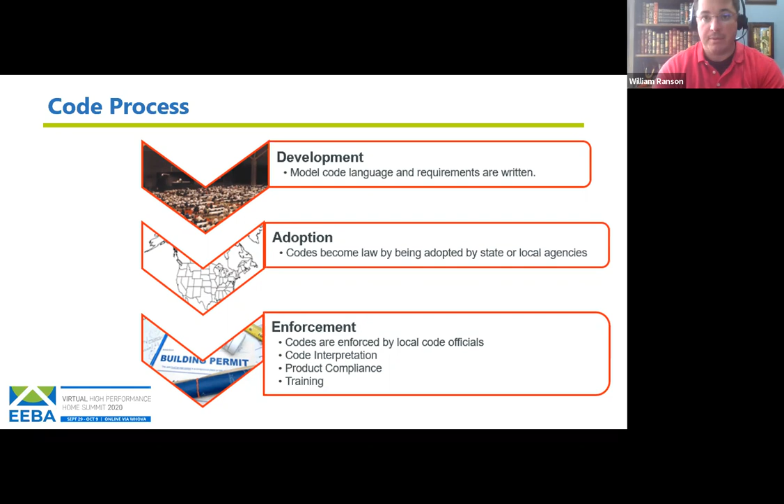And just a quick reminder about helping to understand which codes apply to which types of buildings. But again, here at EEBA, we're primarily focused on single family or townhouse type, 3-story and less. We're going to be talking about the International Residential Code and the IECC residential section of the code, but reminding you there are other code bodies that apply for other larger type buildings as well.

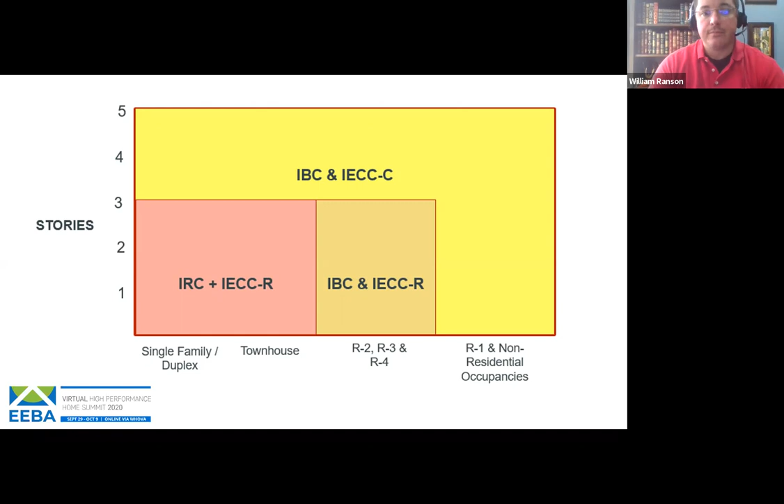One thing that's interesting to point out here, this is 800 plus data points of the most common energy code violations. You see we've highlighted here number 1 and number 4, but almost half of them deal specifically with issues around your building envelope and the R value of the wall itself. So either having improperly sealed penetrations, meaning you haven't put it together correctly, and then HVAC or somebody else came in and put some nice holes in your wonderful air water thermal barrier, or just not having the right R value that's required by the code.

And so this is one we're going to be talking about, some of what the code requires, and then Tom's really going to be addressing multiple ways we've worked to make sure that these are installed correctly as well.

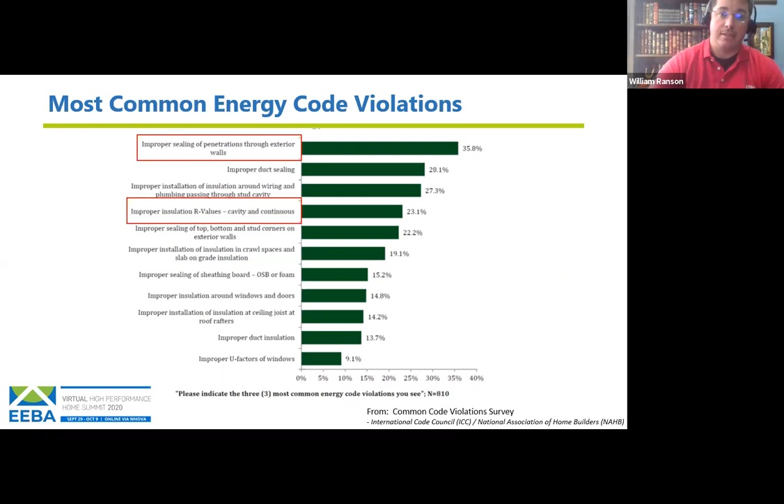One of the positive things about advancing of the IECC is how much energy efficiency we are getting into our base homes now, which also can translate into HERS scores, hopefully everyone's familiar with that. But if you start with the baseline of the 2006 code, there was a goal overall you see for each of the years of a certain percent improvement of energy efficiency over the base code.

And for the 2015 one, you saw they had a goal of 50% improvement, which is pretty incredible. Unfortunately, they only got 34%, but on the flip side, fortunately, they had 34% improvement, which translates into a 34 point reduction in a HERS score of a home built to that 2015 IECC code versus a home built to the 2006 IECC code.

There are lots of things that have been put into the codes that help drive these energy efficiencies. But one of the largest ones, and what we'll be focusing on today, is specifically around exterior continuous insulation.

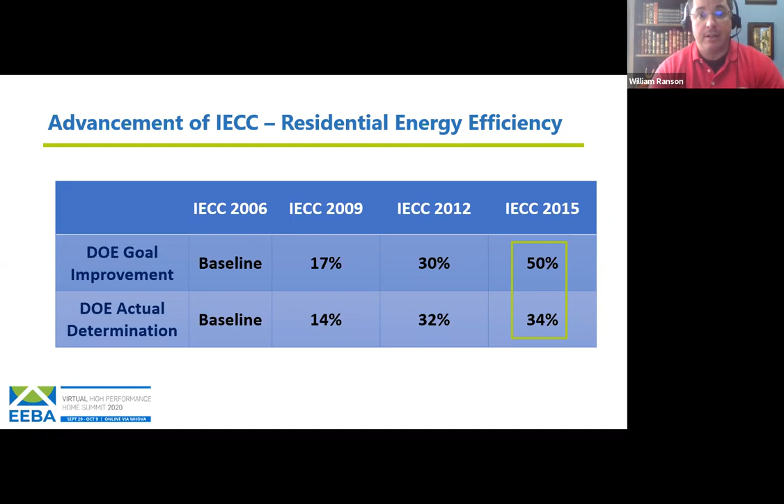You can see here the United States divided up into all its climate zones. Outside of climate zones 1 and 2, there are options in the 2012, 2015, and 2018 IECC for exterior continuous insulation. So what this chart is showing, for example in climate zone 5, starting with the 2009 code, but especially with the 15 and 18 codes being adopted by most states now. For climate zone 5, you would either need an R value of R20 cavity insulation, or R13 cavity insulation with a +5 exterior continuous insulation as well. My understanding of the 2021 updates we're working on is to further simplify this language around what the +5 means, so people don't confuse it with 13 and put another 5 somewhere else.

William, I know states are adopting these codes, but can you give a quick overview for people on the call of where states are at as far as adopting the 2012, 2015, and 2018 IECC or IRC? It's pretty wide variation, all the way down to some places like Arizona that don't have statewide code adoptions.

But in general, and Tom, you can help me with this one too, we've seen that between 2012 and 2015, most every state has adopted up to that point. And then there are a few states leading the way on adopting the 2018 codes. Great, thank you.

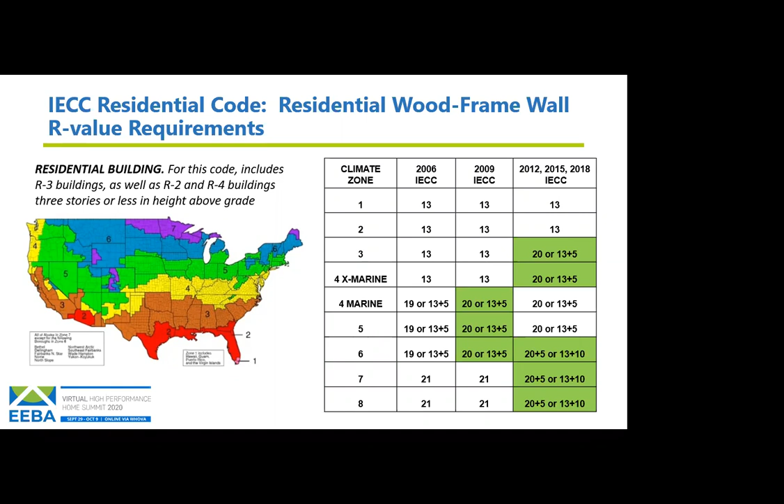Okay, so this is the code we're talking about, but clearly as we move along with codes, it's continuing to recognize the importance in all climate zones of the benefits of continuous exterior insulation.

So why are they putting this into the codes? Why is this such a big deal? Really, the benefit of continuous exterior insulation is reducing the effects of thermal bridging by framing. On our wood frame building, up to 25% of the perimeter of the house is losing heat through conduction through the studs. It's equivalent to having one of your four walls not there in terms of heat flow through the building.

The picture we show here is just an example of, in the wintertime, on the left you'd see the conduction through the studs, the heat loss through the studs, versus putting continuous insulation to reduce that heat loss as well. Clearly that's a generated image, but we have some real life scenarios coming up in the next couple slides of infrared images that show in more detail what we're talking about.

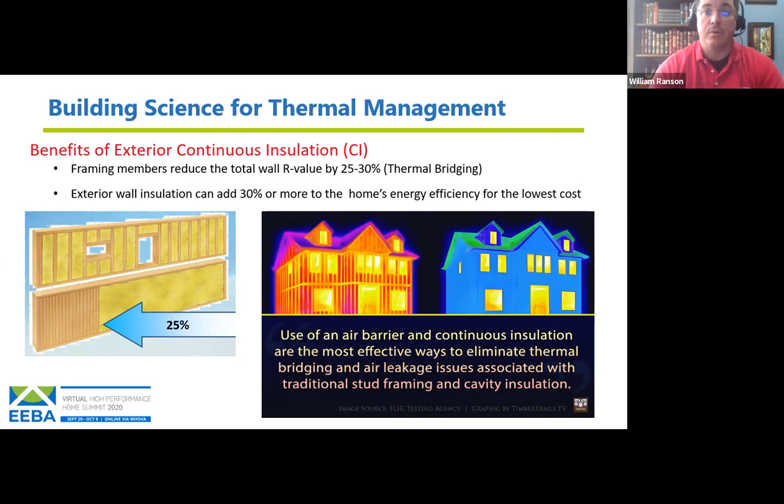Here is one real life example. If you see the picture on the left, what you're looking at is early morning after a cold evening, such that on the outside of the house there's been condensation occurring. However, because of the thermal bridging, because heat from the house is coming through at all the stud lines, it's warmed up the wall where all the framing members are, to the point that there is not condensation there. Granted, this is stucco siding, and there's other issues going on there too.

But what you're seeing here is, because you can clearly see the outline of all the stud lines, that's all the heat loss coming out of the building on that wall. Versus what's shown here, if that same house had continuous exterior insulation, it would not have anywhere near that heat loss or the moisture buildup that they're seeing on the stucco there.

So it gives you benefits both in terms of better energy efficiency for your home, but also better durability of your walls as well, not having potential for moisture accumulation, especially in the colder winter months.

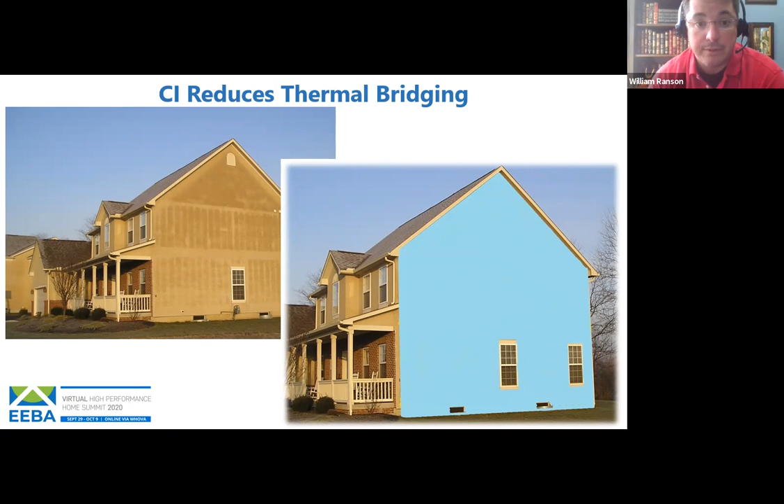Again, this is a similar concept to what I was talking about before. The benefit of exterior continuous insulation is simply that it keeps the wall warmer in the winter, so that condensation, which occurs purely from a temperature-driven phenomenon, is reduced. By having exterior insulation, the OSB or panel board or whatever your structural element is in your wall stays warmer, which lowers the risk of condensation on the first cold surface the warm air will reach - oftentimes the interior of the OSB - which is right where your batt insulation is, and a really bad place to have water accumulating in your wall.

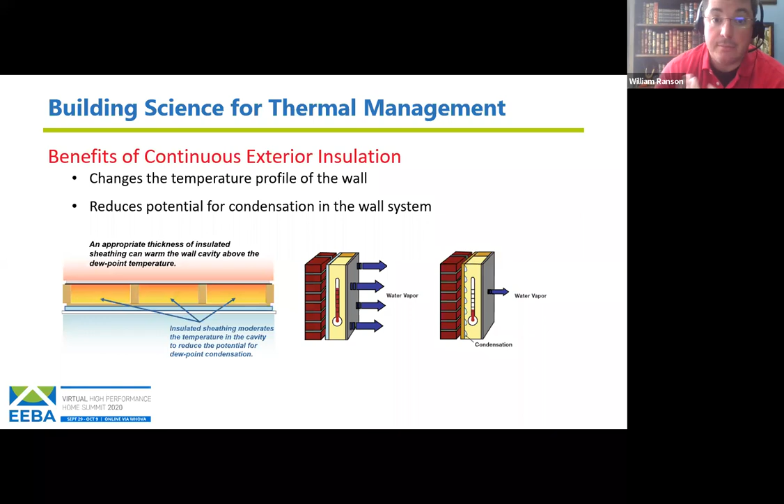And we know this happens because we've measured it. Here's a project where we intentionally had a series of homes all right next to each other in the same subdivision, all with the same general north-south facing elevations as well.

We had 5 homes built 2x6 OSB. If you remember back to the energy codes, it gave you options of either a thicker wall with more insulation in the cavity, or R13, a thinner wall with exterior continuous insulation. So we had 5 homes built with the thicker walls with all the insulation in the cavity, and 5 homes built with standard 2x4 walls with exterior continuous insulation. We put sensors on the inside of the OSB and measured the moisture content over a 3 year cycle.

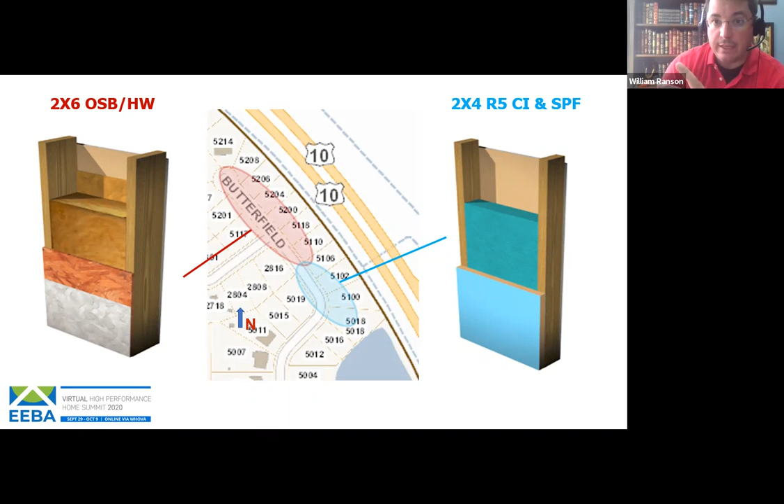All the homes were tested for blower door, all achieved relatively the same numbers, less than 3 air changes per hour at ACH 50, in the 2.8, 2.9 range, so all were pretty similar there. But as each of them were occupied by people, the actual use of the home was slightly different, and we'll talk a little bit about that as we go into the results.

So what this graph is showing here is over 3 winters, and the winters are the spikes where the graph bumps up. Over 3 winters, or 3 years of data, the y-axis is showing moisture content on the interior surface of the sheathing, and this is for all of the houses that were 2x6 with no continuous exterior insulation.

What they show is the bump up in moisture content is always occurring in the wintertime. When it's very cold outside, it's warmer inside, you're having that thermal gradient, and the cold OSB is causing condensation on the interior surface there. Now you do see that it dries out in all the summer times, but nonetheless you're getting above 20% moisture content for several of the winter months. Interesting that winter of 2014, if people remember, was one of those years when we had that polar vortex and it was really cold, hence the much higher moisture content levels you see there versus the other two.

And William, where is this, what zone is this in? What town is this development in? Tom, if I remember correctly, this was in climate zone 4. It was either 4 or 5. It was in the Michigan area. Yeah, okay, then it was 5. So I said then it was climate zone 5.

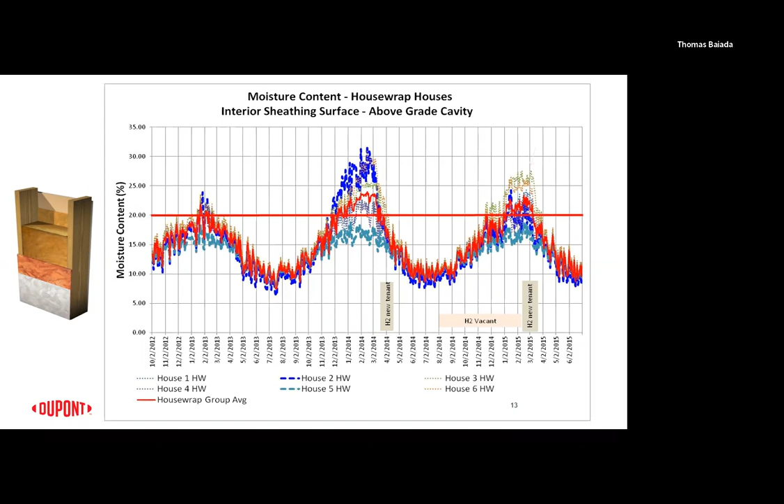But Tom, did you want to add anything on that? Yeah William, I definitely agree. I think that question really pertains to inward driven moisture, solar driven moisture, which, like William mentioned, is a benefit of that exterior insulation, to help block any of that inward drive. So you get that advantage there as well. The exterior insulation also serves as that secondary layer, or intervening layer, that we all know we need to have over our primary drainage layer. So there's some advantages there, like William mentioned.

So what we show here is this wall structure certainly does work, especially if you have an elderly woman who's hot all the time. But if we want to prevent our interior sheathing from ever getting anywhere near that moisture content, we move to 4 houses down in the same development.

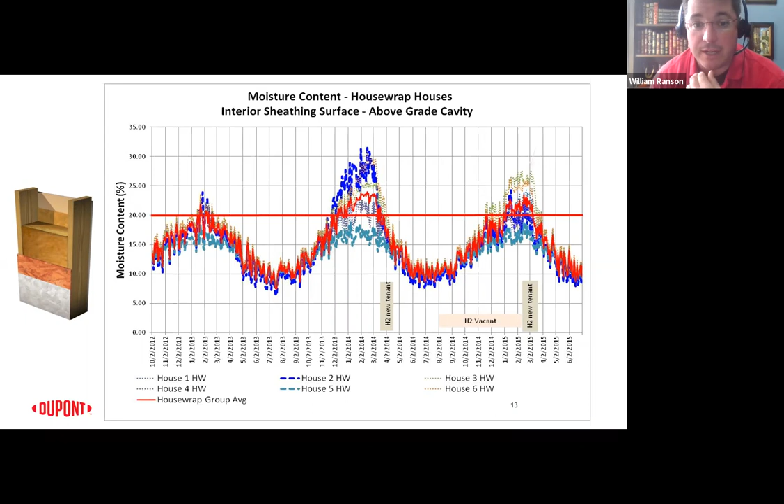You see again for all 5 homes, and the average line shown there as well. So exact same climate, exact same build, everything else the same, slightly different occupant use, but nonetheless a significantly different amount of moisture content in the wintertime on the interior.

We did not, because of such varying use of energy bills, were really able to do a direct apples to apples comparison, but I would surely imagine that these homes would have lower energy bills than if they were built as the homes on the previous slide, used the way they were. Especially the woman keeping her home at almost 80 degrees during the polar vortex. I bet she had some monstrous energy bills.

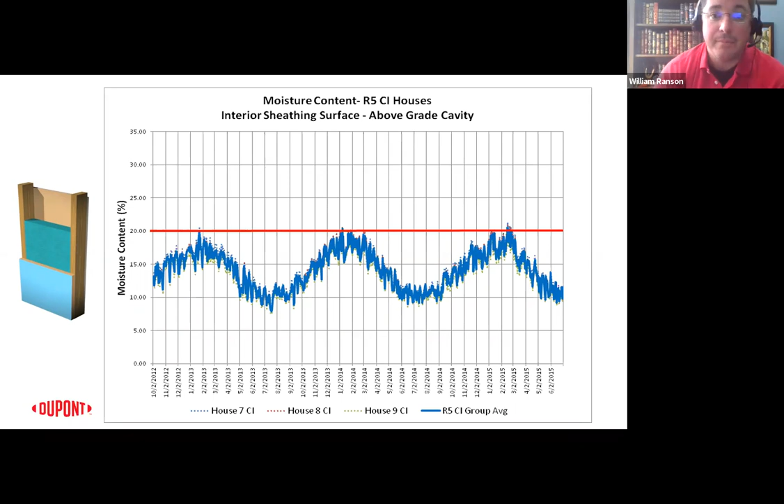But we use these to show the benefits of both the durability as well as energy efficiency. And some other things about continuous exterior insulation before I turn it over to Tom to tell you how to do this properly with an air and water barrier, is that oftentimes people forget that basements are terrible insulators.

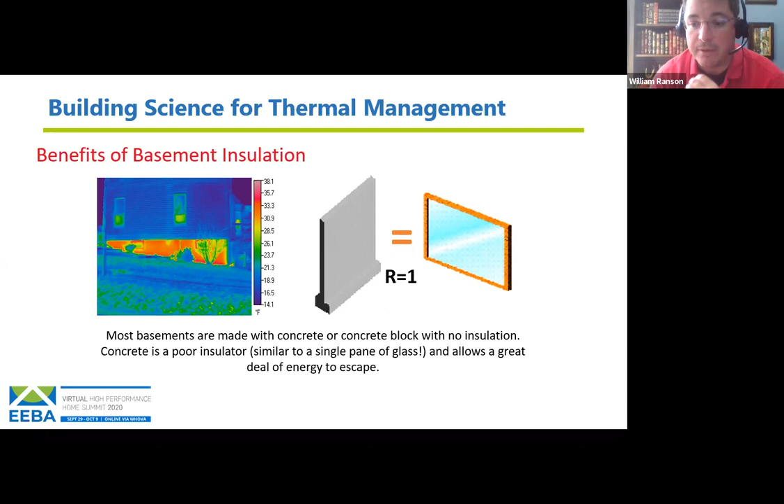In fact, a wall of concrete is equivalent to about an R1, the same as a window. So you can have a lot of energy loss through your house, even the relatively small space that's exposed above ground. And we know this because we've seen it. The next slide coming up has some infrared pictures that show this loss.

We've also modeled and proved with some test homes that simply adding R5, similar to what the codes allow as a +5 exterior option to meet energy code requirements, gives you about an 8-point benefit in a HERS score, simply by adding R5 insulation to the basement. This can be done when the house is being built, on the exterior, or added on after the fact as well.

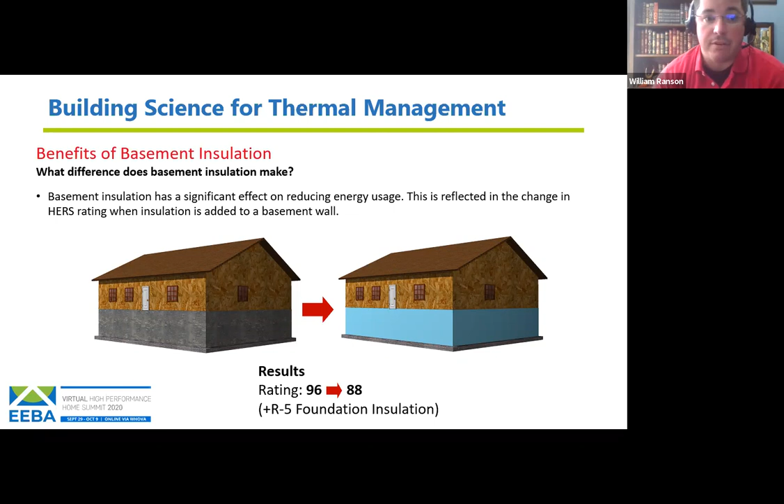So we certainly realize that not only for foundations, but for exterior walls, putting a portion of your insulation outside of your sheathing, having the +5, or in some of the colder climates the +10, helps prevent thermal bridging, helps keep the walls warm, helps prevent condensation that can occur in the wintertime, and makes a more comfortable house with better energy efficiency. Lots of benefits there.

But there are some tricks on how to do it properly. And I think before I turn it over to Tom, if there are any last questions, either on the code or the science behind it, I'll take some of those.

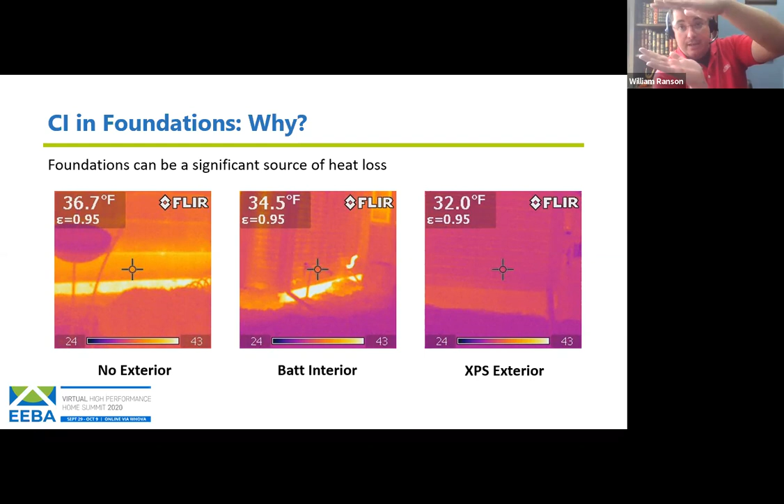The problem that a lot of people have when they have an interior vapor barrier and something like XPS on the outside, and they run into problems, they're actually running into problems with air leakage, because air leakage, especially from the inside, brings an incredible amount of moisture into that wall cavity as well.

We've seen that the critical point to getting this right is during construction, as they typically weatherize the exterior of the house first. If it had been raining while this was going on, they need to make sure to dry out the home to the inside before installing the interior air and vapor barrier as well. Then at that point, they have a very durable wall structure that our colleagues in Canada have been building for 30 plus years with no problems, again, when done correctly.

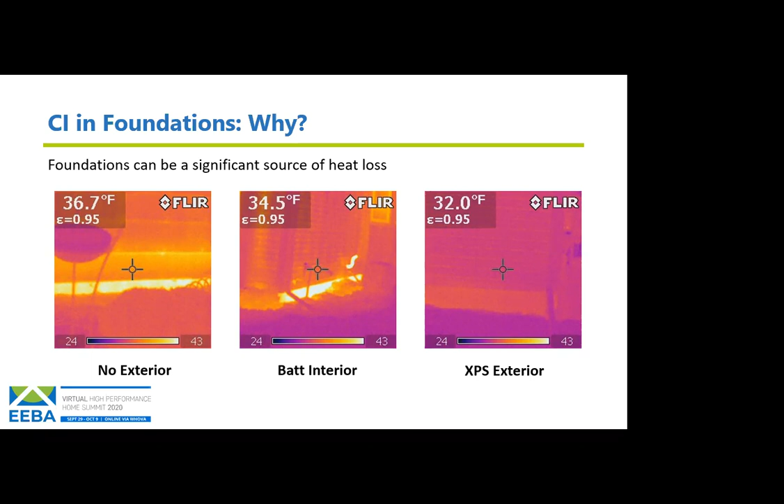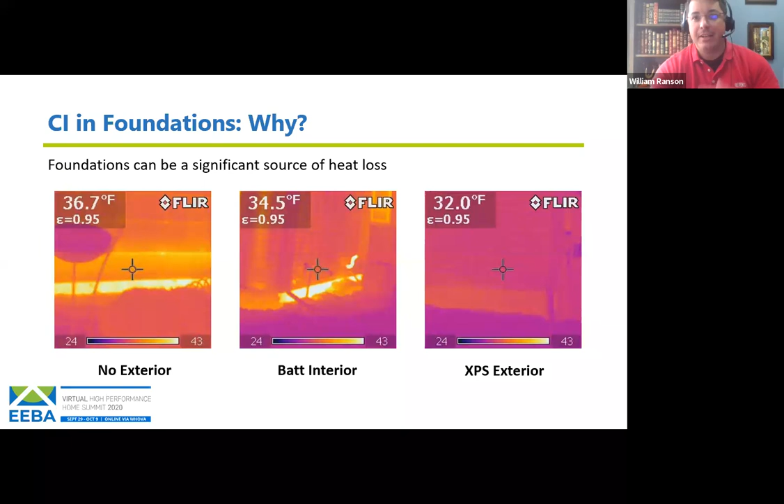So I think I addressed that. Tom, anything to add to that one? No, I don't. I think you nailed it. Okay, you can disagree with me, it's okay. Tom and I have worked together since he was in college and not long after I was in college. So I'll turn it over to you, Tom, to go through your part of how we make this happen.

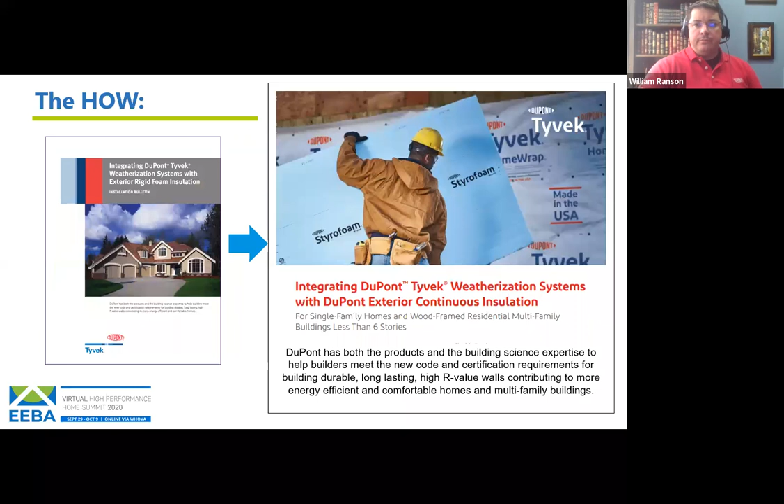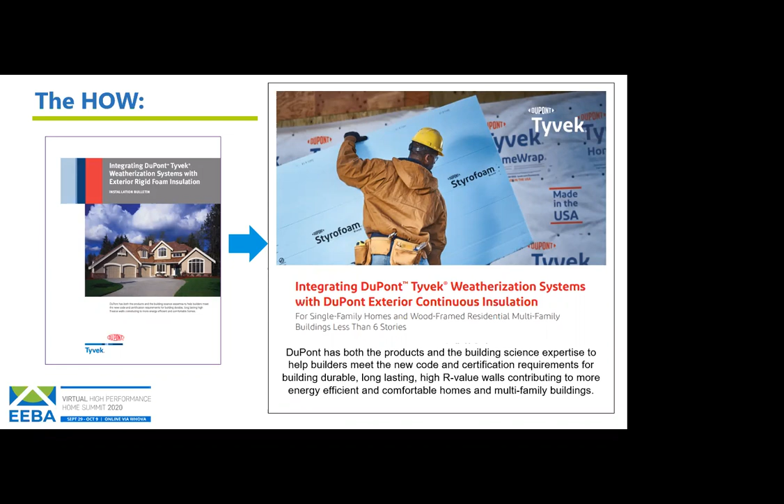Tom Baiada here, part of our technical support team, and I've actually worked in the development of some of the details of the how. Hopefully you understand some of the basics around why exterior insulation is a good idea, but then how do you go about implementing that and executing a good installation on your homes to make sure the details are carried out correctly, that you're air sealing, as William alluded to, and installing the products in the correct order. So you may be asking, what is that correct order? We want to go into that a little bit here.

I'll back up just a second - this is aimed primarily at single-family homes and lower-rise wood frame buildings, multifamily buildings that are essentially built like a big house, think garden-style type of building. So it certainly applies to townhomes as well. Next slide, William.

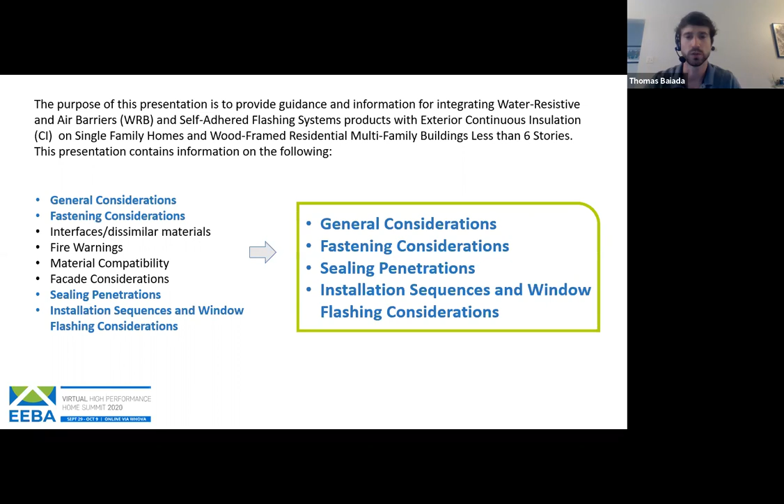So kind of as we get into those categories, right? Starting out with some of the general considerations, essentially what I have here on the left is the text from the document, but I want to highlight some of the key areas and considerations that you're thinking about.

We always talk about the WRB and where the flashing should be in relation to it. Of course, you want the flashing on the same plane as the WRB so that you create one continuous drainage plane down the wall path, so that any water that may get behind your cladding, whether it's vinyl siding, fiber cement siding, even brick or stucco, you have that continuous drainage plane that directs water out and away from the building.

So you want to carry that same principle here when you're installing exterior insulation. There's multiple ways to do it. You can see in the bottom right there, we're showing a simple view of exterior insulation either over the WRB on the left, or the WRB over the insulation on the right.

What we want to get into is that a wall is built as much more than just that opaque wall that you're seeing there. It has windows, it has dryer vents through it, pipes. So we want to make sure that we're considering all the different parts of a wall assembly so that it can be executed correctly and we don't have any issues.

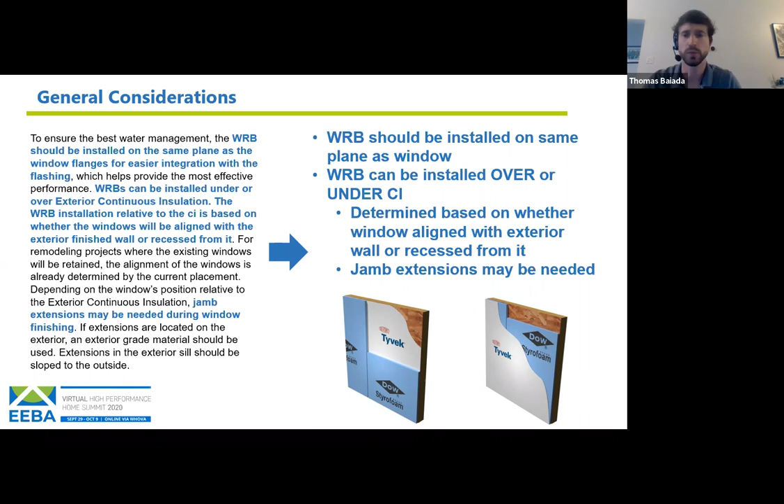As you get into what this really looks like, what I was talking about here is having the windows either aligned with the finished wall or recessed from it. And that's really within this document I mentioned, how we've split up the different applications. So when you look at how you get your windows planed back out to that exterior wall, again regardless of cladding, there's a few different ways to do it.

It can be either under or over the insulation, the CI, continuous insulation. In order to have the WRB under the insulation though, and align the windows with that wall, you're going to have to bump out that window. The window is going to have to be brought out the thickness of the insulation to plane it back out with the cladding layer.

The reverse of that, of course, is if you put your WRB over the insulation, like what is shown in the picture there, it simplifies some of those details. We'll get into that as well, but you can see that that detail looks pretty similar to your typical window installation method, with the exception of the bump out.

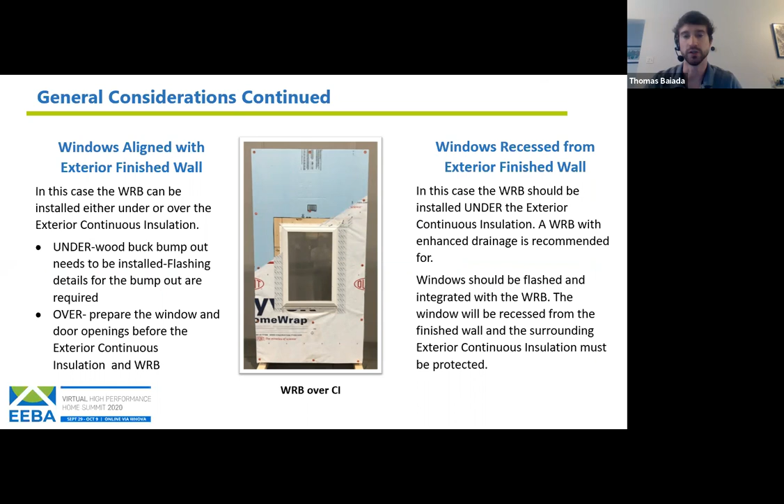And so there's a few considerations there, right? There's considerations around when these different materials are being installed. Of course, we always, as much as possible, try to promote minimizing the number of overall penetrations through your WRB layer. And so there's different methods for doing that.

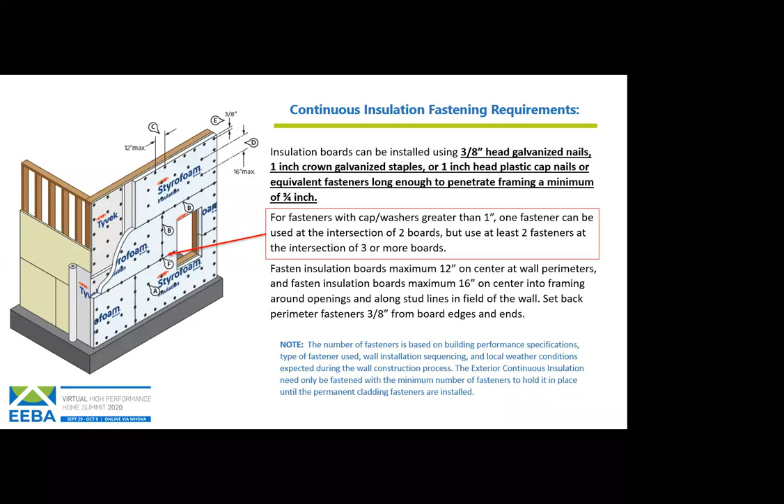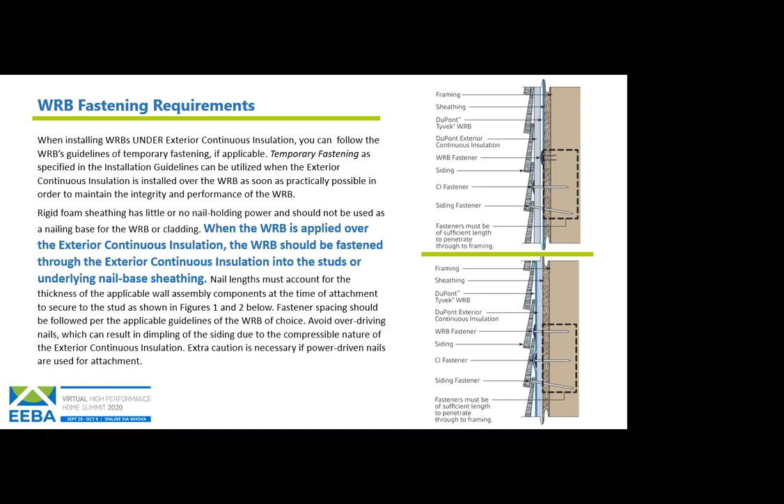Tom, yes, just a quick question from Jeffrey Luoma. He says he has compressed wood particle board underneath the siding. It doesn't hold a nail that well. Any experience with keeping this or changing it out? I believe your comment was you got to mark and hit your studs on that, but please answer that one. Yeah, that's a good question. You are going to have varying substrates depending on the time of construction of the building, whether it's a reside building or new construction. So certainly, yes, the recommendation in that case would be if you don't have a substrate which has the nail holding power that you would otherwise be looking for, like an OSB, you would absolutely need to make sure that you're hitting a stud to make sure that you have adequate holding power for either the WRB layer or the insulation layer.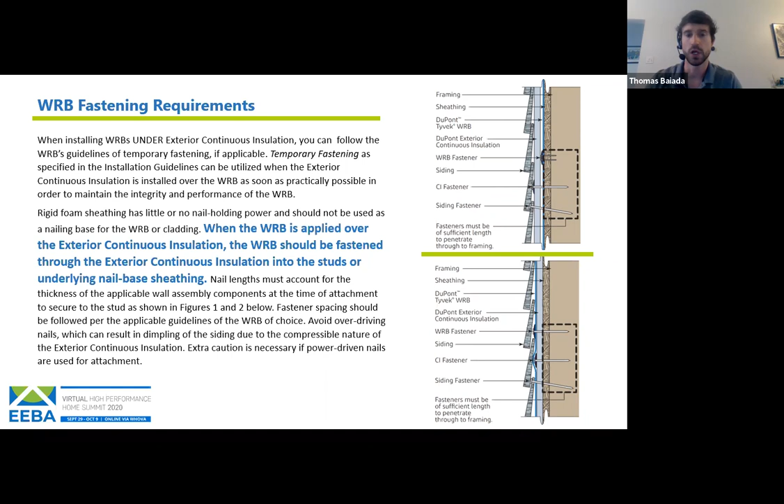So that's where, again, we're showing the penetration there into the stud. And then the next slide here actually talks about that penetration depth specifically.

For the insulation, we're showing the styrofoam, the XPS, extruded polystyrene insulation. So when you're thinking about the depth of that, we're talking about a penetration into the framing member of a minimum of 3/4 of an inch.

So if you have an inch of XPS insulation, equivalent to that R5 per the code requirement, at least in certain climate zones, you'd be looking at a 1.75 inch minimum.

And that doesn't even factor in the thickness of the sheathing, so it would actually probably be about a 1/2 inch thicker than that. So that's where you're factoring in the thickness of the insulation and increasing your fastener that much more to ensure you're getting adequate holding power.

And so the recommendation for the types of fasteners for insulation, there's different methods or fasteners that can be used, even down to a typical 3/8 inch head galvanized nail. The best recommendation would be a cap fastener.

Of course, you get much more holding power, as well as reduce the likelihood that fastener is going to penetrate further through the insulation than you want it to. You want it to sit flush with the insulation to help hold it in place.

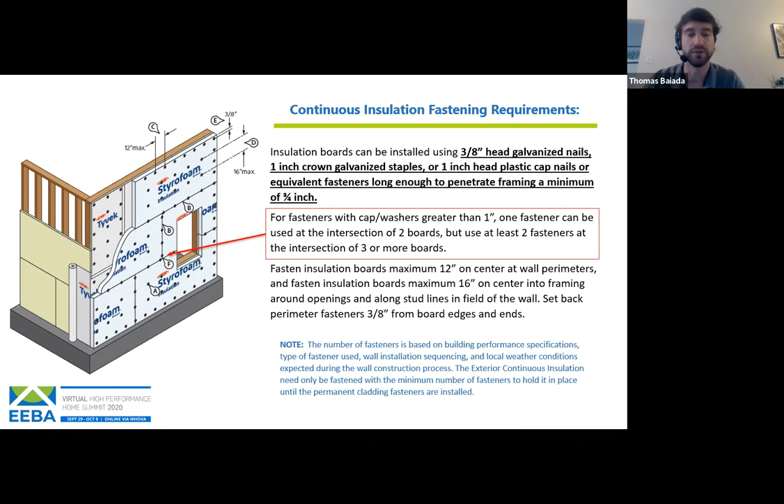Next slide, William. One interesting thing as we were developing these details, we realized we have flashing products to seal pipe penetrations and other details. So as we were thinking about some of these smaller penetrations that often can be made late in a construction process—if you have HVAC and you realize you haven't quite put a vent where you need it to.

Or a dryer vent where you need it to, it's easy enough to drill through the wall and put that penetration where it needs to go. But how then do you seal it? How do you make sure you have that same level of air and water holdout if you have the WRB now installed behind the insulation?

So that's what this depiction is showing here, is that if you have a penetration like a pipe penetration that's drilled through the wall late in the process, the reality of the practice then really to seal back to your drainage layer, which is the WRB, is removing the insulation around that area so that you can access the WRB to seal off to it around whatever that penetration may be.

So we'll talk a little bit more about some of the advantages and challenges of the different installation methods here. Clearly, this shows an advantage for installing the WRB over the insulation, because in that case, if that penetration through the wall is made late in the process, your WRB is already the outermost layer. So you would just be simply sealing to the WRB layer like you otherwise would in your typical construction practice.

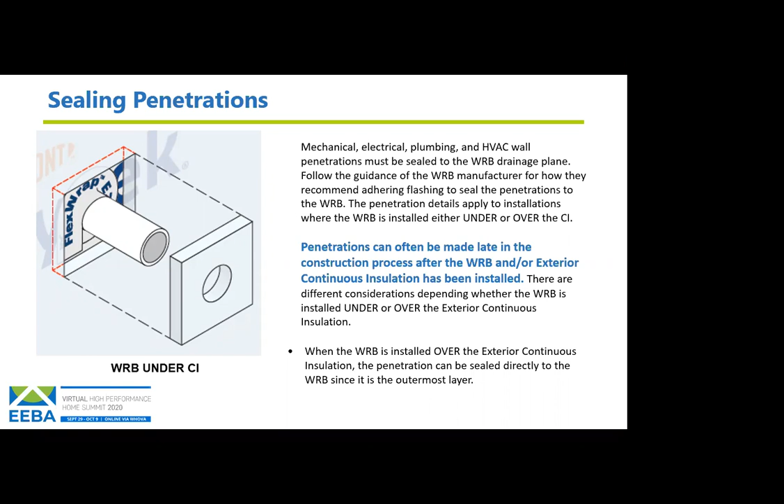Tom, is it best practice still—what we used to do when I built was all the penetrations had to be done before the weather resistant barrier went onto the house, so we didn't face that problem. Is that still the best practice you recommend? Yeah, that's absolutely the best practice, and that happens 100% of the time, right? No, it doesn't. The reality is some things change, right? You might...

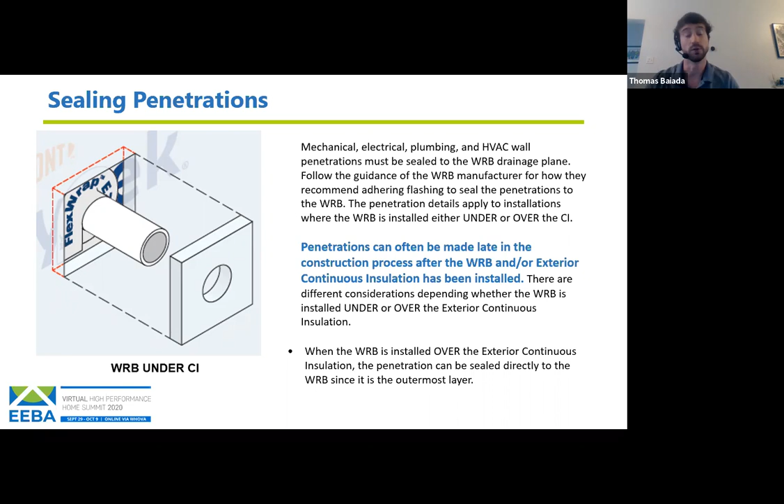You might get an RFI or something changes late in the process of construction, and that's just the reality of how construction goes sometimes, unfortunately. So these are things you think about, maybe call it forgiveness of the construction practices. How are you accounting for those things, and are you ensuring your trades will easily be able to seal to this, and what's the likelihood they'll take the time and effort to do so? These are some considerations you can think through in the overall design and sequencing of materials.

This is a little bit of a busy chart, but again I spoke to advantages and challenges. The columns here are WRB under CI, WRB over CI, and the advantages and challenges of each. I'll start with under CI and advantages. You're installing your WRB first, so it's going directly over, probably with OSB or plywood as your sheathing, so your fasteners follow a standard installation like they always have. So it's a bit of an advantage from that standpoint.

Your WRB layer can be installed with a temporary fastening method if the insulation layer is going to be installed soon thereafter. And of course, all WRBs are susceptible to UV light - it's just the nature of how polymers work, so we have to take that into account. The foam actually helps provide additional protection. So if your trade is installing the WRB as well as the foam, and you have a separate trade for your siding, depending on scheduling, that foam can help protect the WRB layer and ensure you're not going beyond the UV limits of whatever WRB you may be using.

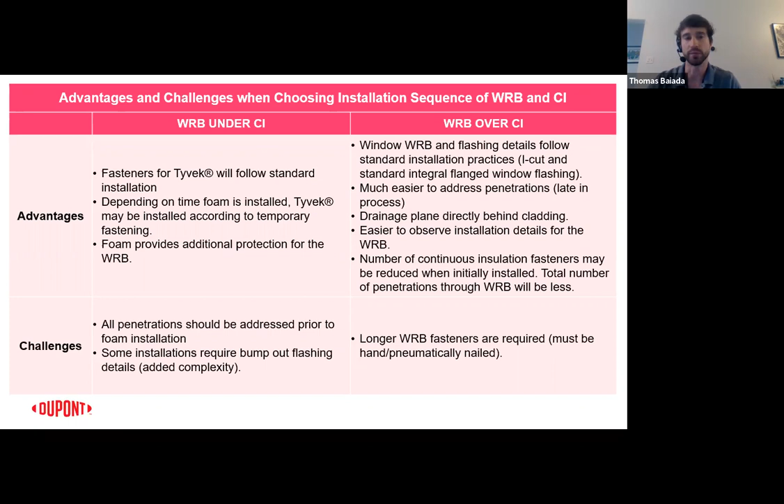From an inspection process, or if you have a third-party inspector verifying the details of your installation, it's going to be much easier to observe that installation if the WRB is over the CI. And going back to the number of fasteners, the continuous insulation fasteners can be reduced when initially installed. The main challenge there is making sure you have those longer fasteners for the WRB, because it's going over the CI, so you're accounting for the thickness of the insulation to get back to a solid nail base for holding the WRB into place.

Okay, so we talked about the different methods for installing the insulation, the WRB - is it under, is it over, and how does that affect the windows? This is really a key area. We broke that down into 5 sections. Certain areas of the country, the windows are installed before the primary WRB layer, versus after. That's the split on the right versus the left of these 2 tables. We accounted for that as well as the CI under and over, and we're going to break down each one of these sections here. I do have a note at the bottom - I mentioned this a little bit earlier.

In terms of installing a window over the insulation, do you need to bump it out? Do you need a wood buck there to directly nail the window into if it's an integral flange window? Ultimately that comes back to the window manufacturer. Based on our internal testing, as long as you've accounted for the thickness of the insulation and are getting adequate penetration back into the stud for structural support, we have testing showing that if the insulation thickness doesn't exceed 1.5 inches, that can be considered. But ultimately it depends on the window manufacturer and their recommendations for their particular product. So make sure if you're installing a window directly over the insulation that the manufacturer is okay with that as well.

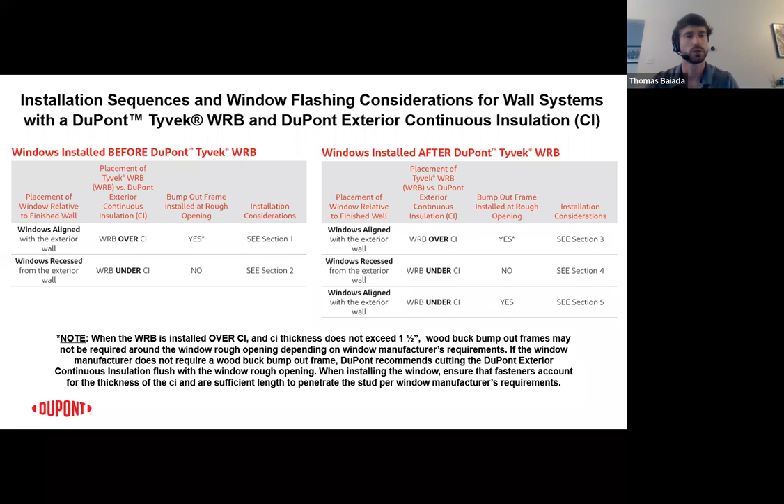Going into the methods of the different sections, there are 5 sections. Sections 1 and 2 show the methods when windows are installed before the primary WRB layer, so you're addressing and flashing windows before putting the rest of the WRB on the wall. This usually comes down to sequencing of trades. But if you're combining that now with the installation of insulation, how do you do that?

Looking at section 1 on the left, having the windows installed before, you want to align them with the exterior wall. The best way to do that is to have the insulation behind the WRB. So the basic breakdown of the layers is: adding that solid wood buck if needed, the insulation layer, protecting your window sill with a product like FlexWrap or some other sill protection method, installing and flashing the window, and finally installing the WRB and sealing it off to the flashing - that's the sequence of materials for that type of method.

If you look at section 2, where you're installing the insulation over the WRB and not bumping that out, you're going to have that situation where the window is potentially recessed from the exterior wall, and things like exterior jamb extensions may come into play. So back to a question earlier, we're showing the crinkled type of wrap there, the drainable wrap, to help promote drainage between the layers.

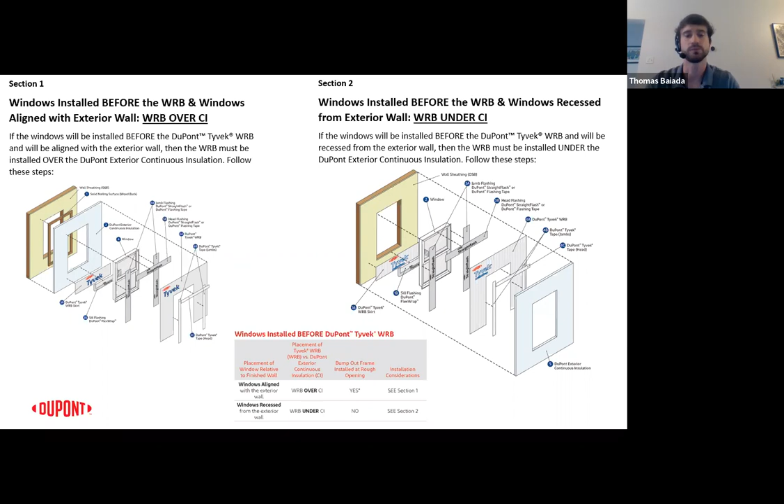I'm highlighting this particular slide as one of the methods that I think is going to be more common, and it also shows the installation of the WRB over the insulation, back to some of the advantages around that. If you look at the breakdown of the sequence of layers, it's another scenario where you consider whether or not a wood buck bump out would be required prior to the installation of your insulation.

Once you've installed the insulation, installed the WRB layer, then you install your window, again with sill flashing, then flashing of the jambs and head, and finally sealing off the head flap. This is a method that I'd say is more likely more common, depending on certain markets, geographic areas, climate zones. This is showing the windows installed after the WRB.

So sections 3 through 5 show the installations with the windows installed after the WRB. You don't have, if you noticed in the previous slide, there's a skirt method or an apron method that the sill flashing is integrated with in order to bring that out to the outside, and that doesn't come into play when you're installing the windows after the WRB.

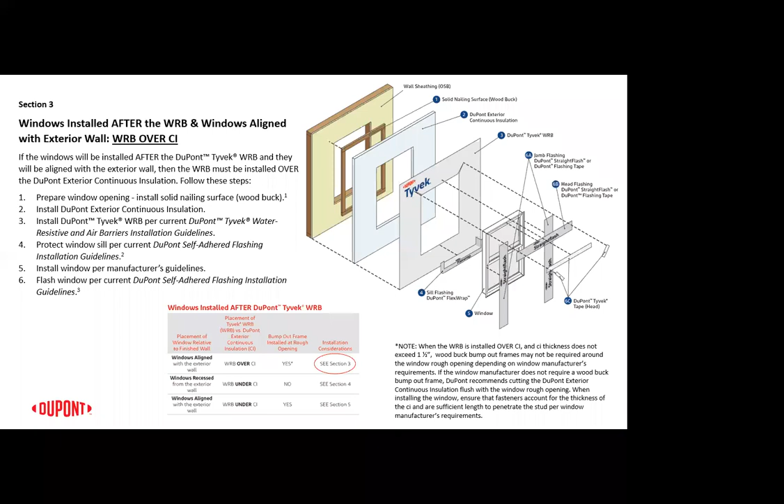Well, I think if you are interested, some of it goes back to your fastener recommendations, right? So if you're smart about your fasteners and fastening both at one time, that's going to save you on installation, right? Absolutely, that's a really good point. Great.

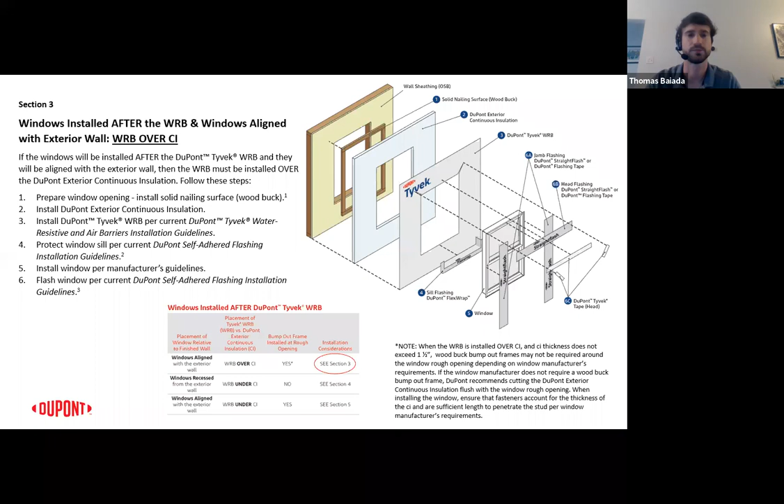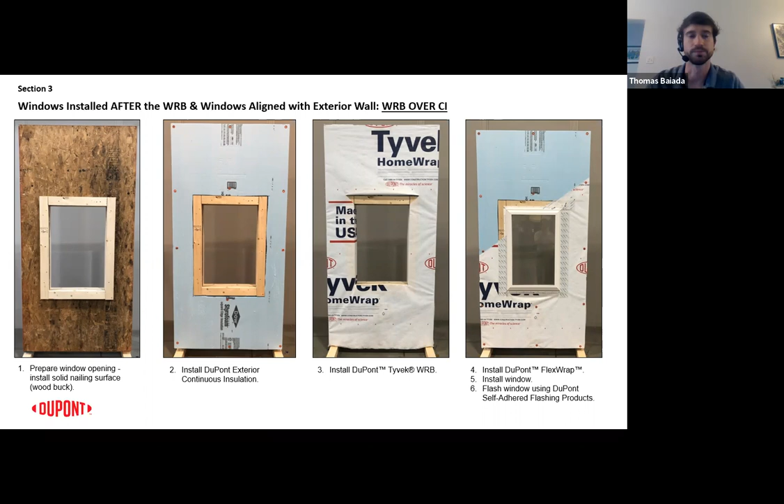So of course, this is the situation where you may need to consider jamb extensions from the exterior, depending on the recessed amount of that window.

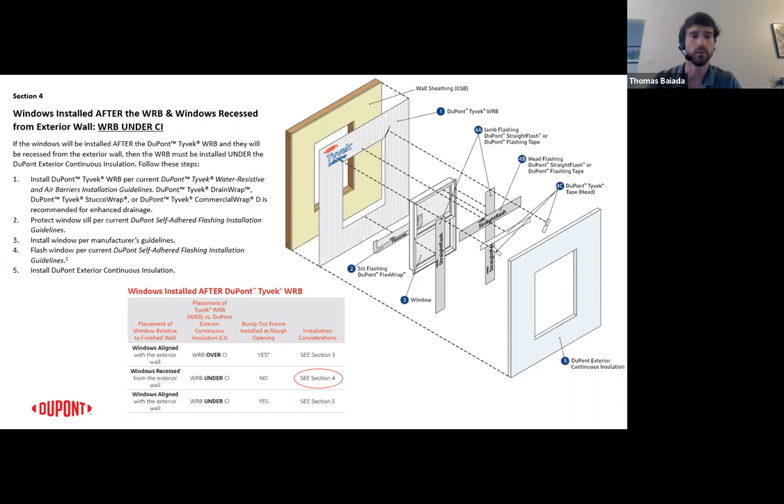And then finally, this is fairly common, at least in my experience supporting mostly multifamily construction. I've seen this detail used fairly commonly, where the WRB is installed over the sheathing, but they want to move the window to the plane of the cladding layer. So if you have the WRB on the sheathing, yet you want the window on the main layer, you still have to integrate your flashing back to the WRB.

So that's going to require you to bump out that window and then use a different detail to flash around that bump out in order to make it air and water tight.

And you're doing all of that prior to the insulation going on. So from a labor standpoint, you're doing most of the work for the layers there, especially around your flashing details, with your last step being the insulation, and then finally the cladding would be going on.

And so the slide after this, I have a breakdown of what that process looks like.

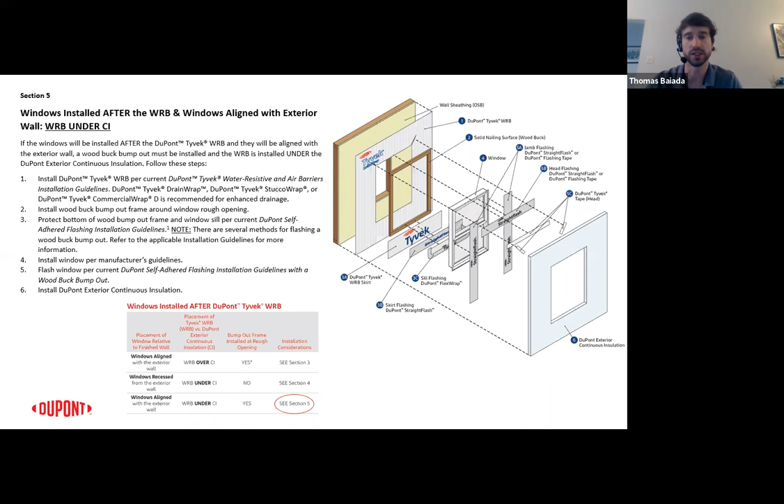So if you look at installing your WRB first, there are different methods for treating a bump out. DuPont has several methods for doing so. Again, this is a method where, if you look closely, you can see that the Tyvek is wrapped into the opening before the bump out goes on.

But in some cases, you may have those bump outs on the wall before the WRB is installed, so there are different methods for accounting for those types of details as well. But nevertheless, you have the WRB layer installed, you have a bump out, and then you begin to flash the opening.

Of course, you need to protect the sill before the window goes in. So you can see right away that you're doing some more complex flashing details to build out from the main plane of the wall to that sill, which is now on a different plane, making sure that that is all sealed up correctly.

So there's different methods. We're using a piece of the WRB, an apron, versus the image to the right, which shows flashing there if you look closely. So there's different methods, taking into account cost of materials versus ease of installation. I've seen preferences for both, so we have options for both.

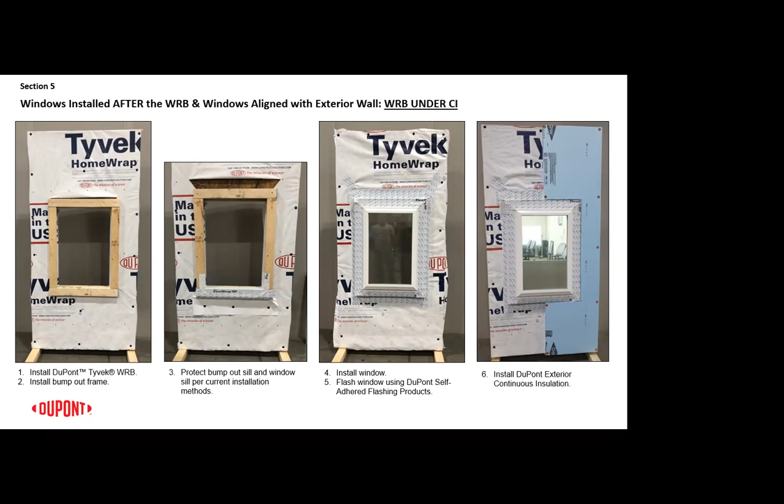The second picture shows the flashing method before the window goes in. Once the window goes in, you end up with several more pieces of flashing, because you're going from that WRB layer on the main wall plane over that bump out plane and then over onto the flanges of the windows. You're doing that around the perimeter of the whole bump out area to make sure it's fully encased, because you now have to treat that as part of the drainage plane.

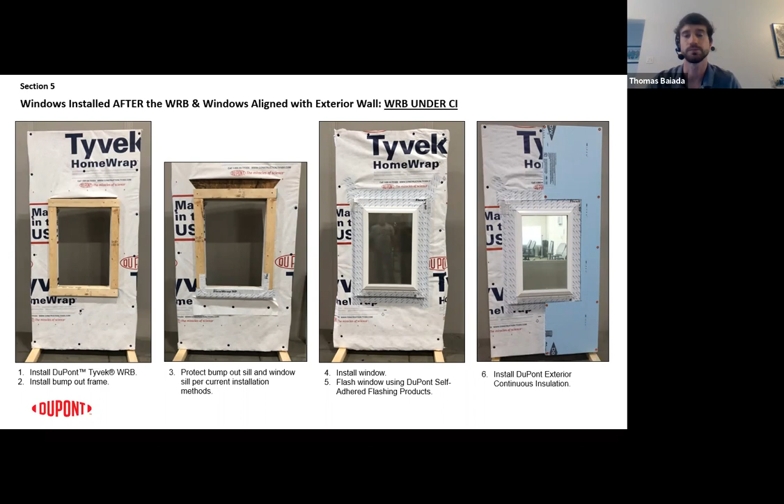And then, of course, you're integrating back to the sheathing above the bump out prior to sealing your head flashing, again to account for proper shingling of materials. So, like I said earlier, the last step, once you complete all those flashing details, is installing your insulation layer. I believe that is all the slides I have as far as execution for carrying out some of these details. Hopefully you found that helpful.

I'll take a break now and see if there are any additional questions.

It's fantastic. I think I posted the DuPont Knowledge Center, but I think it's always helpful before you go to install the continuous insulation and WRB in your windows, that you almost look at a video or look at some cutaways. Is there a place to go on DuPont Knowledge Center for people to find that information?

Yeah, so we have several different areas you can go. We have a resource center that you can get from the main DuPont page that will have all your installation guidelines, including the particular installation guideline that has all of the details I shared today.

But as you mentioned, Aaron, another good resource are animations. The Construction Instruction app, if anyone is familiar with it, it's a fairly well-known app available on your phone and on your computer. There's actually a lot of animations that show different installations, and we're actually in the process of finalizing some new animations right now to cover these exact different scenarios, all five of them. So those are coming very shortly.

They're not out yet, but I would definitely recommend taking a look at that app, because there are existing videos and animations out there that do a really great job of showing the process of different installations, and really help folks understand in the field. You don't have to read it, right? You can see the step-by-step process and pause the animation. It's a really nice tool in addition to our installation guidelines that you can find on our website.